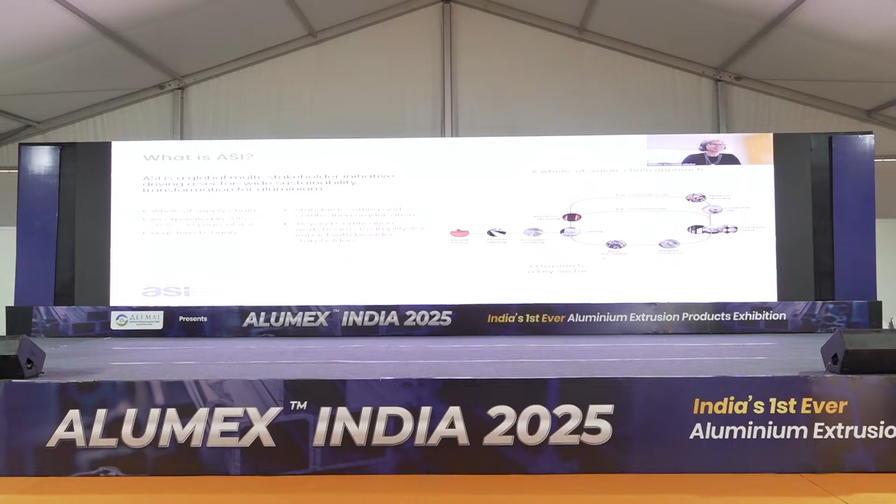We're 10 years old this year, in 2025. We were incorporated back in 2015, and we are a registered charity. Our prime focus is on standard setting and certification, but we also work beyond certification, as we call it, to try and amplify our impact with broader stakeholders such as communities and Indigenous peoples.

Our membership has been growing very steadily over the last 10 years, and we are getting closer to 400 members. Through our certification program, we have more than 500 certified facilities across 63 countries. In India, we have a range of members that are headquartered here, as you can see on the left, and on the right, a selection of some of our extrusion members globally.

What we do is work to promote measurable and continual improvements in the key environmental, social and governance, or ESG, impacts of aluminium, and that underpins the decisions that we make as companies. We have a standard setting and certification focus, but beyond that, we are also working to train and build capacity for members, auditors, and other stakeholders to implement these better practices.

We collaborate through partnerships and with other organisations, including through cross recognition, to try and make sure that we can leverage what we're building in ASI and connect it with the huge amount of work happening in this space. We also carry out data and research to measure and evaluate the sector and the value chain more broadly.

The traditional one can be applied in a layout of, for example, a horizontal or a spray vertical line. You start with an alkaline cleaning, rinses, the deoxidation of the surface, and then it's ready for conversion coating and rinse. It is true that this rinse before the conversion needs to be of the best quality possible. So if it's possible, DI water, much better, or if not, maximum 100 microsiemens. So this is a Henkel solution, an example of a line for an alkaline degreasing.

We have different products, or by acid, as Bonderite CAK 2105 or the 24600 that I will talk about later. Acid etching, and of course this conversion coating, our Bonderite 483031 or our Bonderite 400. Both products are approved by Qualicoat and also by GSB. It works at really low temperature and low concentration compared with chrome 6, which works at a high concentration. The layer of this product is milligrams per square meter, so it's really a low conversion coating, and it can also be applied by APNR, and I will explain later what the APNR system is.

So in that case, I would like to introduce this new product, a new launch from last year, which is the Bonderite CAK 24600. It's a traditional alkaline degreaser, an alkaline etching degreaser.

In the traditional step, this kind of product is a mixture of soda, potassium, and other additives. With this new product, we are able to etch the material at the same time, as you can see, 2 minutes, keeping the same rates, but we are able to decrease the temperature.

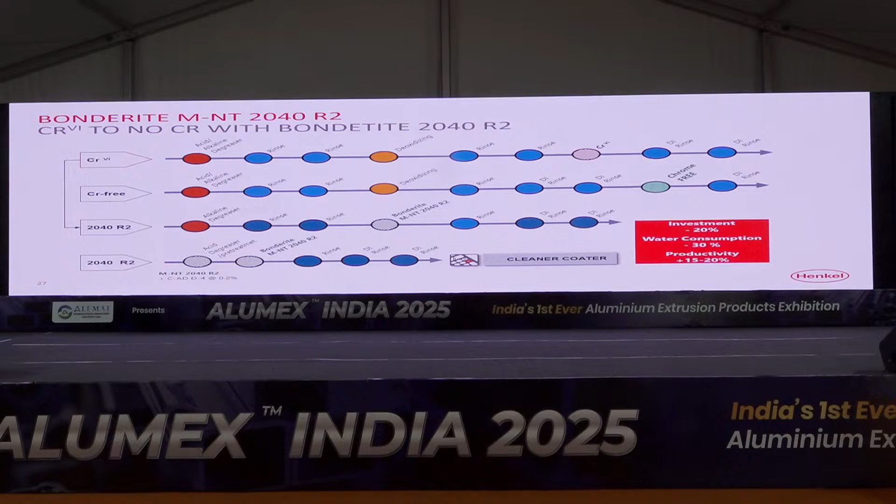And last but not least, this is our APNR system. What is an APNR system? It's an adhesion promoter, no rinse. It's equipment that can be easily installed at an existing customer. At the end of the line, it's spraying a mist. You are mixing the product at the same time, so it's free of pollutants, and you can ensure that your material will be free of pollutants. It's always fresh. It goes directly to the material, and it's only a dust.

It's a mist. So for the wastewater treatment, it's not a quantity of water, so you can save a lot of water. This is really useful, for example, for customers that are working with Chrome 6 and want to change to a non-Chrome 6 system. Why is it important? Because if you've been working with Chrome 6 for so many years, in these Chrome-free products, 1 ppm of Chrome is a pollutant. So you can damage the non-chromium product, the process itself.

So if you install this APNR at the end of the system, you create the non-chromium without any problem and without any fear that the material will be contaminated by the Chrome 6. We have more than 100 units installed and working perfectly. And as I told you, it can be an option for all the customers that want to switch from a Chrome 6 technology to a non-Chrome 6 technology with a minimum investment, because it's really easy to install and no modification in the line is required, because it goes directly at the end of the line.

Designed with sustainability in mind, Bonderite APNR significantly reduces chemicals, water, and waste, enabling safer handling of your product. Enjoy consistent, high-quality results without the need for constant supervision. Bonderite APNR keeps your line running smoothly with our own fresh chemistry. Are you ready to revolutionize your metal pre-treatment process? Discover the power of Bonderite APNR, where innovation meets simplicity.

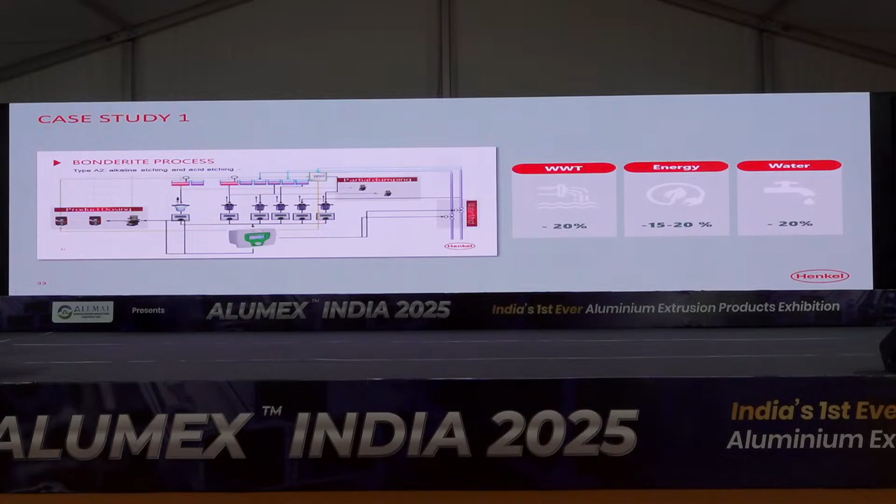Okay, so here is an example of a real existing customer who installed the APNR and all the pumps and all the equipment to control everything in alkaline etching and acid etching, and that was after some months of treatment. That was the results directly from the customer, that he was able to save 20% in wastewater treatment. They reduced the energy between 15 and 20% with the previous process, and they reduced also the water consumption of the total plant.

And the last topic, let's talk about anodizing and sustainability, our most innovative product for the anodizing. Our challenge in anodizing, and not only in anodizing, in most of our products, is to try to get the same quality, but with more sustainable products in terms of reducing time or reducing temperature during the pre-treatment, and if it's possible to give our customers energy savings or less water consumption. So this is the aim. So we will be focused on etching, anodizing, and sealing.

For the etching, I would like to introduce the Bonderite CAK 62350. This is a product aimed to get the E6 finishing to the material. And the benefit of this product compared with the traditional ones in the market is that it's really easy to rinse off. Remember that it's a really high alkaline bath, so it's really sticky. So with this new improvement of the product, it's really easy to clean it. You avoid over-etching, and as you clean it easily, you avoid also the carryover.

Now let's move to the anodizing additive. Everybody knows that anodizing, if you want a good quality of anodizing, you must keep the temperature between 18 or 20 degrees. In theory, it's not possible to create a good quality of pores, not able to anodize over these 20 degrees. With this additive, this Bonderite MAD 2008, we achieve 24 degrees.

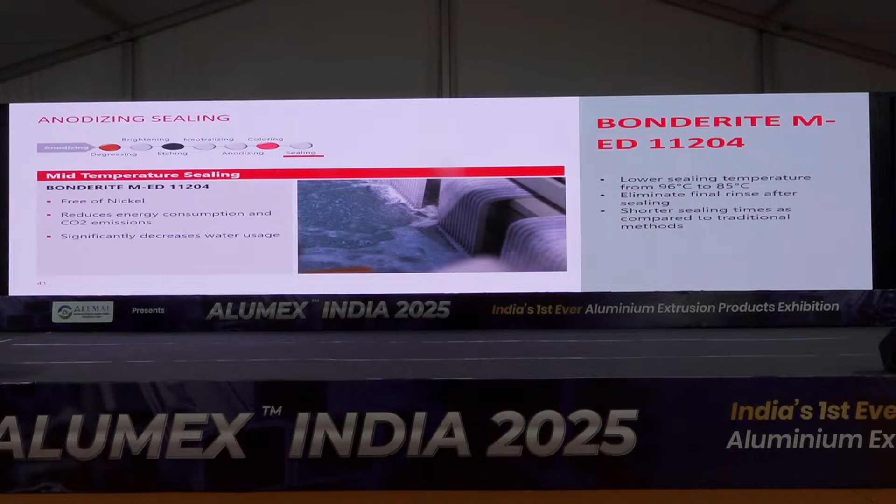As soon as the material is sealed, you can discharge it and sell it as soon as possible. And it even has shorter sealing times compared with the traditional medium temperature sealing. So it means that you reduce the energy consumption, the CO2 emissions, and of course the water usage.

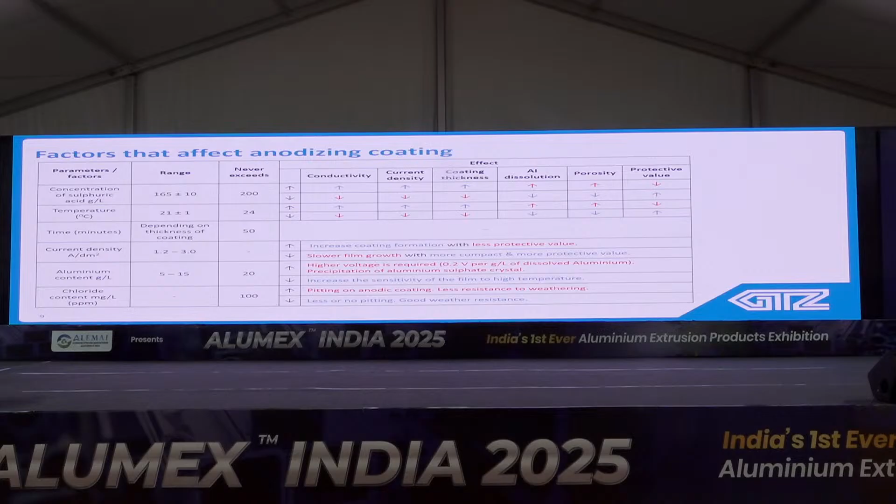Aluminum content in the electrolyte is also important. If aluminum content is more than the maximum range, then higher voltage will be required. It is not desirable. Heat generation will be more, and the coating aesthetic look will be less. Then chloride. Chloride is detrimental for any corrosion resistance coating. The same logic is applicable to anodizing coating also. The maximum tolerance is 100 ppm. So for anodizing, DM water, chloride-free water, is desirable.

Now I will be discussing types of anodizing. There are three types: type 1, type 2, type 3. The major variation is the coating thickness in microns. Type 1 is the least, and type 3 is the highest coating. Another is the variation in the electrolyte. In type 1, chromic acid electrolyte is used, and type 2 is sulfuric acid. Type 3 is also sulfuric acid with lower temperature and higher voltage. So the application is different. The major application is type 2 for general decorative and functional architectural purposes. Now the classification is two types: one is natural non-dye type, and another is dye type.

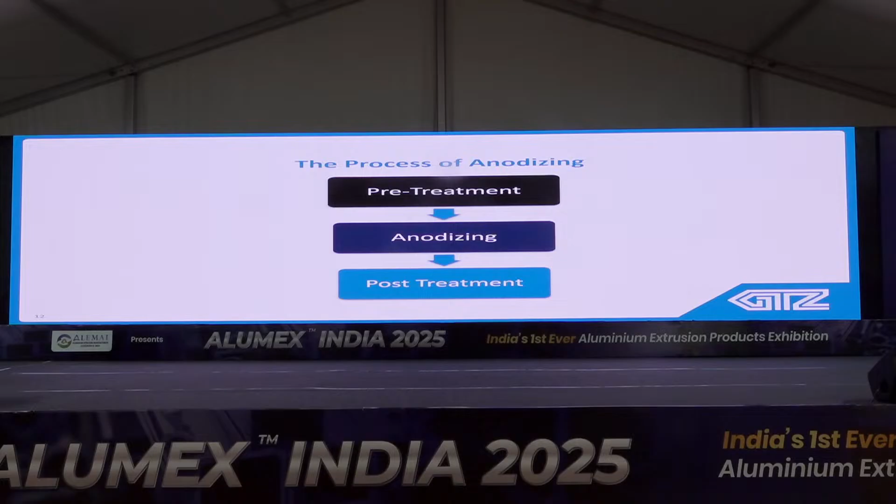The total anodizing process is pre-treatment, then main anodizing. After that, post-treatment includes coloring, electrocoloring, and sealing. So this is the pre-treatment synopsis for natural anodizing: acid degreasing, caustic degreasing, desmutting, and then sealing as post-treatment. For satin finish anodizing, one extra process is there for satin finish after desmutting, then another desmutting. So before anodizing, the pre-treatment always ends with desmutting. Similarly, bright anodizing: non-etch type alkaline cleaner, followed by chemical brightening, then desmutting, then anodizing.

For color anodizing, electrocoloring, possibly dyeing, and immersion chemical dyeing. But after anodizing and coloring, sealing is a must, and in every variety there is sealing. That is the last and final treatment of anodic coating.

Suitability of aluminum and its alloys. There are different types of alloys that can be anodized, but the most popular are the 6000 series and 7000 series. 6063 is versatile and mainly used for anodizing purposes. It is an alloy with silicon and magnesium.

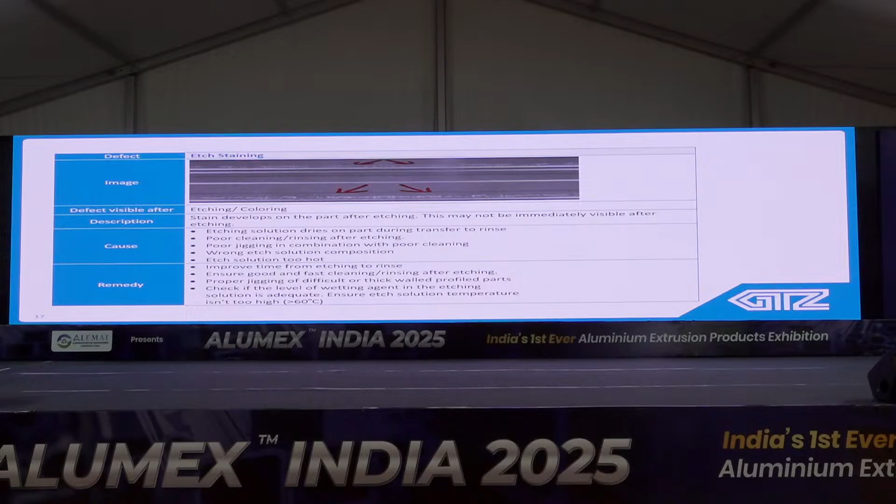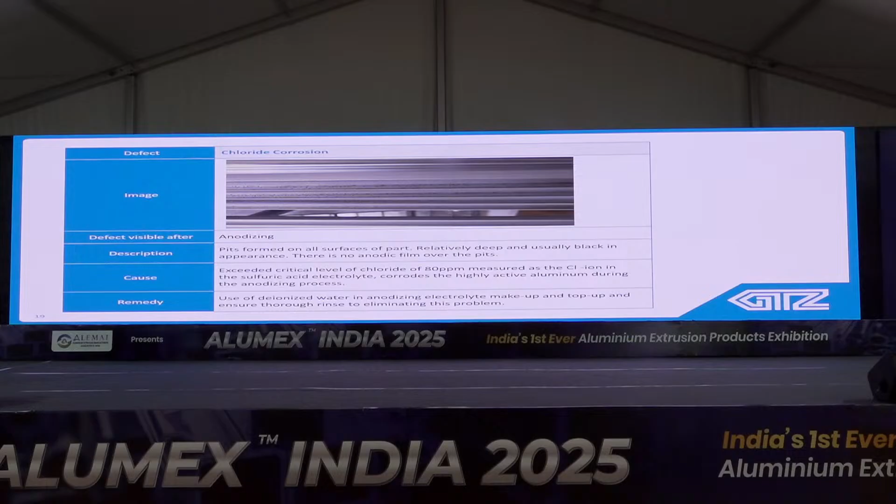Chloride corrosion can be visible after anodizing. Pits are formed on the surface. So how is it remedied? Use a chloride-free bath, chloride-free water in the anodizing bath, and take care to avoid any drag-in in the anodizing bath from the earlier stage.

White spots are visible after electrolytic coloring, dyeing and sealing. There are varieties of white spots with many reasons, depending on the shape and location of the white spot. Main causes are poor rinsing, poor desmutting, and mold formation in both the rinsing bath and dyeing bath.

So how to improve it? Rinsing can be improved by excess flowing of water and increased time. For fungi growth, the rinsing tank water should be changed, or fungicide or algaecide can be added.

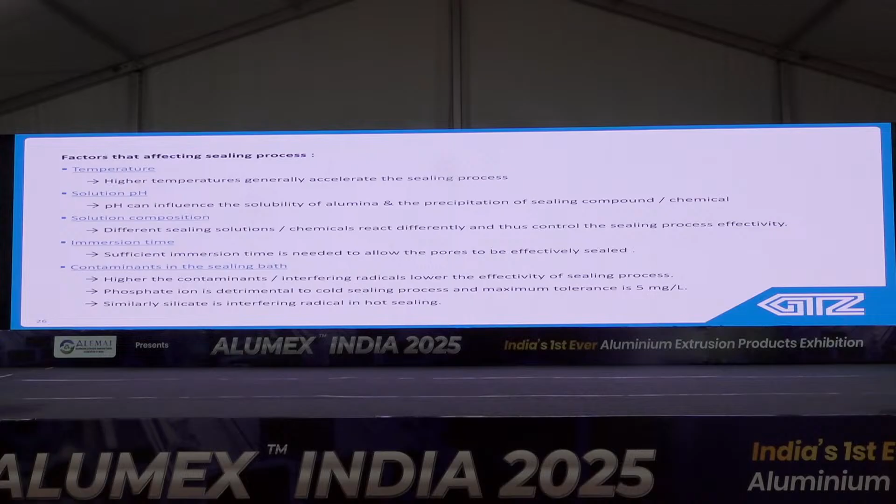Now, type of sealing depends on the temperature of application. There are three types: cold or room temperature sealing, mid temperature sealing, and hot sealing. Cold sealing is mainly divided into three parts based on composition. First is nickel fluoride base, second is nickel acetate base, and third is the newly developed nickel-free chemical.

Initially it was based on lithium, but due to the introduction of lithium batteries, lithium is becoming costlier, so magnesium has been attempted, because magnesium is in the periodic table diagonally opposite to lithium. So most properties of both lithium and magnesium will be similar. That's why magnesium-based nickel-free sealing, both for cold and mid temperature, is gradually becoming popular.

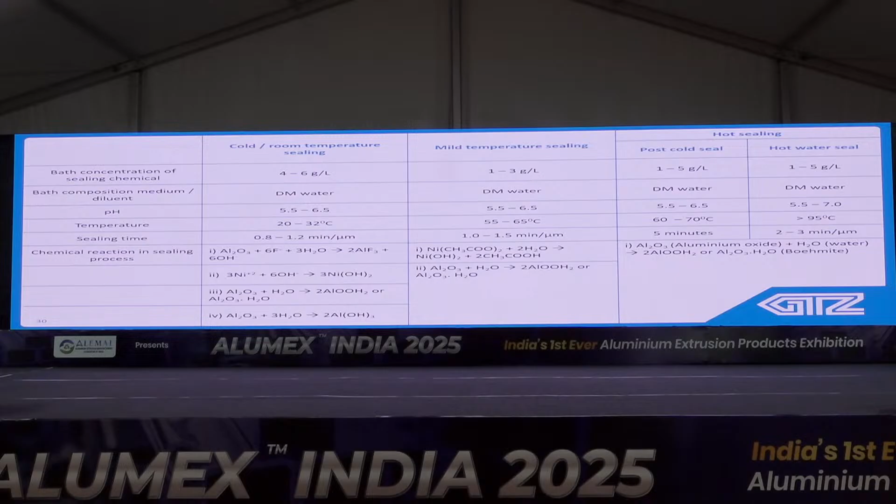Another hot sealing is also done after cold sealing. Here time is not so important; only 5 minutes is required for this post cold sealing treatment.

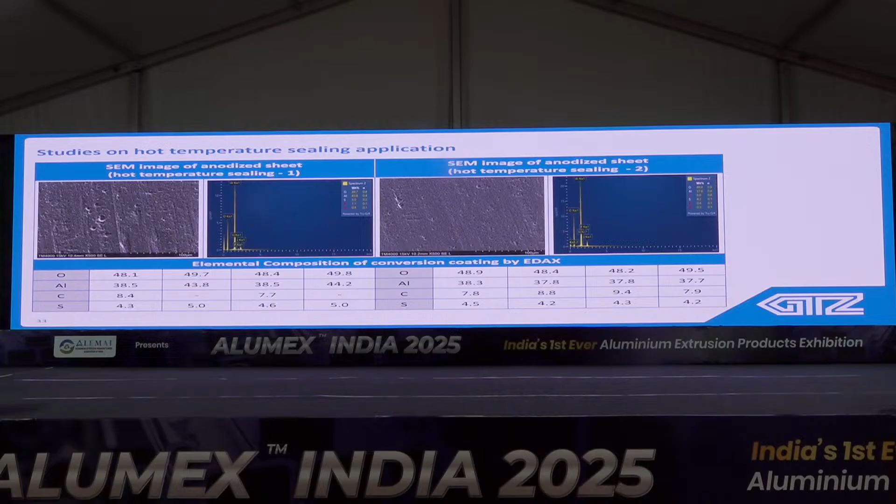Now the hot sealing, similar in picture type to mid temperature. The first picture of the same is the half sealing stage, and the second is the full sealing stage. Here there is no metal, so you can see from the carbon, which represents organic content, that in half sealing, carbon is not uniform and the average is still less. For full sealing, carbon is everywhere and the content is higher than in half sealing.

Testing of sealing quality involves mainly four tests. One is the dye spot test as per ISO 2143, mass loss test using formic acid and phosphoric acid as per ISO 3210, then admittance test—since aluminum oxide is inert and not conducting, aluminum conductivity will be less, so admittance is measured, which should be less than 20 microsiemens, and one is a visual test.

So I have completed the polynote system, more or less all parameters and details. Now I will move to the polycoat system, which is the pre-treatment or conversion coating on aluminum prior to powder coating.

This is the process flow diagram. Initially pre-treatment surface preparation: degreasing, etching, desmutting, or a 3-in-1 system. Then pre-treatment, which is conversion coating, is of three types. One is hexavalent chromium based, and depending on color it is further three types. Green, which is less commonly used and mainly for military precision, has the highest coating thickness or weight.

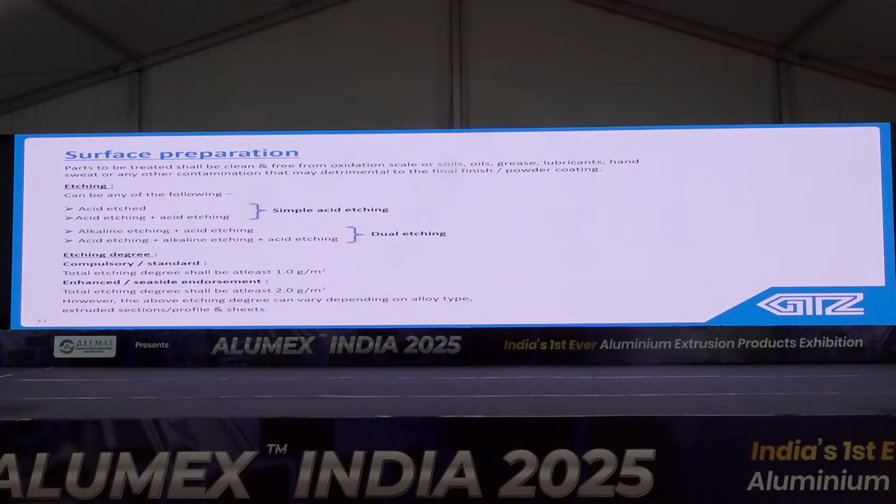Now I will discuss chrome 6 conversion coating, that is yellow. This chemical is mainly of two types depending on the component of the system: single component and double component, A and B. One is for initial bath preparation, and the second, B component, is for bath maintenance.

The special parameters: pH is similar, 1.8 to 2.2. Application temperature is room temperature. Curing time may be natural curing or at some 60 degree temperature. PMT can be applied for quick drying. Dipping time is 2 to 6 minutes for single component, and for double it is 3 to 9 minutes.

We have tested different coating weights at different dipping times. For single component, dipping time 2 to 6 minutes, and coating weight matches our normal specification of 600 to 1200. Similarly for double component, dipping time is 3 to 9 minutes, and as time increases, coating weight also increases, but remains within specification range.

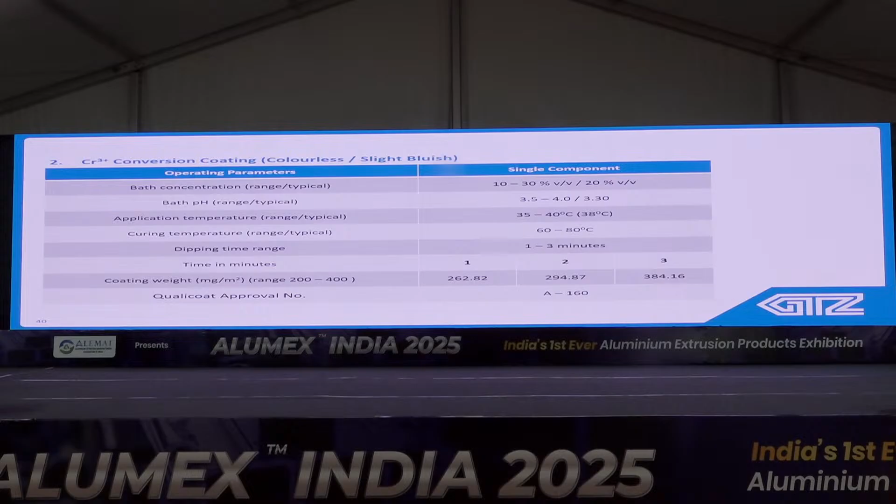For chrome free, the colorless version has a little lower consumption than the yellow color. Yellow color is just double the colorless coating, because thickness of this coating is also higher. pH is similar, application temperature is room temperature, curing temperature is around 60 to 80 degrees. Dipping time varies: for colorless, as coating weight is less, it's 2 to 4 minutes, and for yellow it is 4 to 8 minutes. The coating range for colorless is 75 to 150 mg per meter square, and for yellow it is a little higher, 300 to 700.

It is also Qualicoat approved. The approval number is A159, so it also passes all the Qualicoat parameters after powder coating.

Now, what is the advantage of chrome free? It is environment friendly, and RoHS, ELV, WEEE, REACH, and OSHA compliant, with satisfactory corrosion resistance similar to chrome containing product, compatible with paint, powder coat, easy wash treatment, and higher heat resistance.

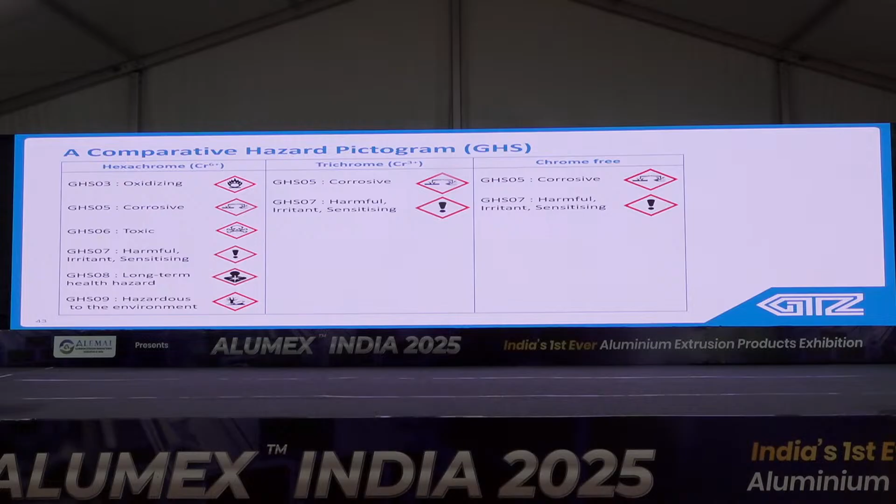So this is the hazard pictogram. If you consider hexavalent, all types of hazard are there, and it is also carcinogenic. In trivalent chromium, only corrosive and harmful, and chrome-free is also similar, but trichrome is the intermediate, as there are some papers which indicate that trichrome on prolonged exposure to UV light can be converted to hexavalent. That's why trivalent is the intermediate step and chrome-free is the final step to get RoHS compliant coating.

This is the same EDAX study of chrome-free clear. On the left side is the same picture of the coating before SST, salt spray hours. And this is the EDAX spectrum for elemental composition. We have selected 3 areas and the composition is given there. So before salt spray, just check the titanium content. It is average 7.7%, and after SST, when 5% white rust appeared, it became average 4. So titanium is washing out after salt spray, and titanium is the major contributor to the salt spray hours.

The first slide is the same picture and EDAX spectrum of chrome-free yellow before SST, and the right one is the same picture and EDAX spectrum of chrome-free yellow after salt spray, that is 5% white rust. Here also the main components of chrome-free yellow are organic and titanium. Before salt spray, you can find a higher content of carbon as well as titanium. After salt spray, both carbon, which is the representative of the organic chemical, is getting reduced, and titanium is also reduced.

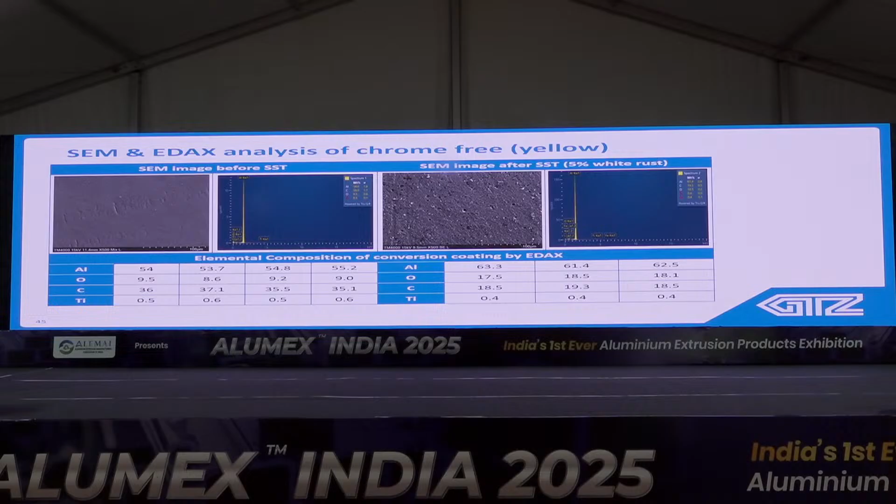Chrome-free conversion coating is very suitable and can replace both hexavalent chromium and trivalent. Different options have been attempted for chrome-free formulation, but titanium, zirconium or a mixture of both are found suitable, and it can replace both hexavalent and trichrome passivation.

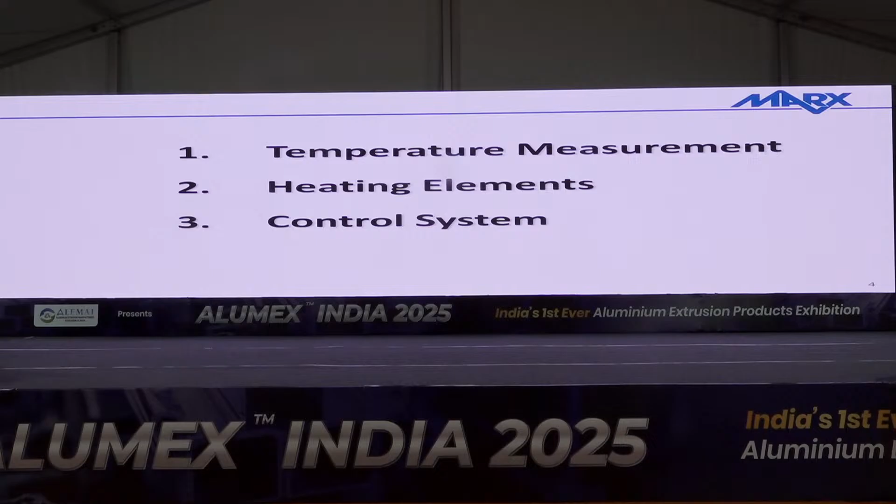I'll present now some key elements of smart temperature control in a container. The first is the temperature measurement, two, the heating elements, and three, the control system. First of all, the temperature measurement. You can see here a drawing of a container, and you see here many zones: zone 1, zone 2, zone 3, and zone 4. This is a heating system with four zones. And you can see in each zone there's an insert for thermocouples with two measuring points. You see here zone number 1. There's measuring point number 1, measuring point number 2, and the same for the other zones.

In the middle, we have a thermocouple. With this thermocouple, we can ensure that the temperature in the mantle doesn't get too high. So temperature recording in the container is very important, for the health of the container and also for the good quality of the end product.

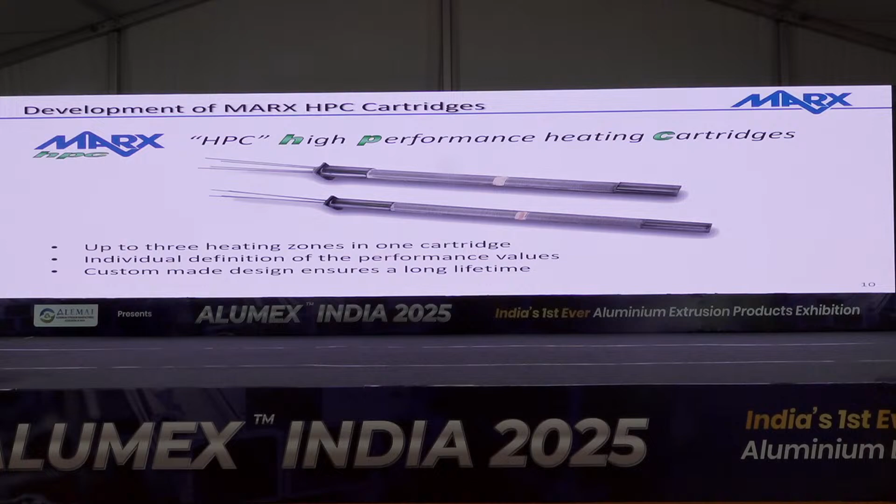The second key element are the heating elements. So I'm presenting now the Marx HPC cartridges. These are the high-performance heating cartridges. We can achieve with these heating cartridges up to 3 zones per cartridge. With this kind of cartridge, you have an individual definition of the values in each zone. And it's also possible with this cartridge to have a custom-made solution for every heating system and for every requirement of the customer.

These are some possible heating zones that can be reached with our heating cartridges. You have here one zone heating, you can get also 2-zone heating, one ring at the die side and one ring on the stem side. You can have also upper and lower shell, and also 6 zones here with rings and upper and lower shells.

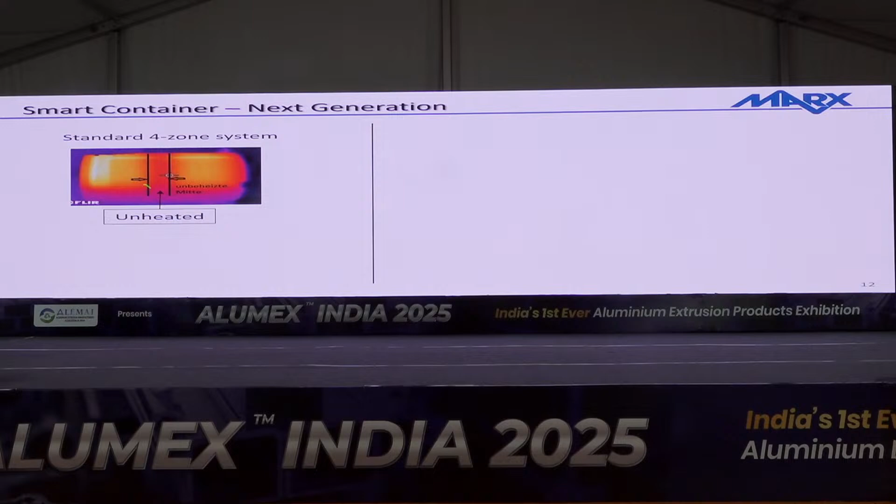Here you can see a standard 4-zone heating system. You have an unheated area in the middle of the container. You have zone 1, 2, 3, and 4. And this is the new heating system which we call next generation. Also here you have a variable heating zone in the middle. So this is really a physical unheated zone in the container.

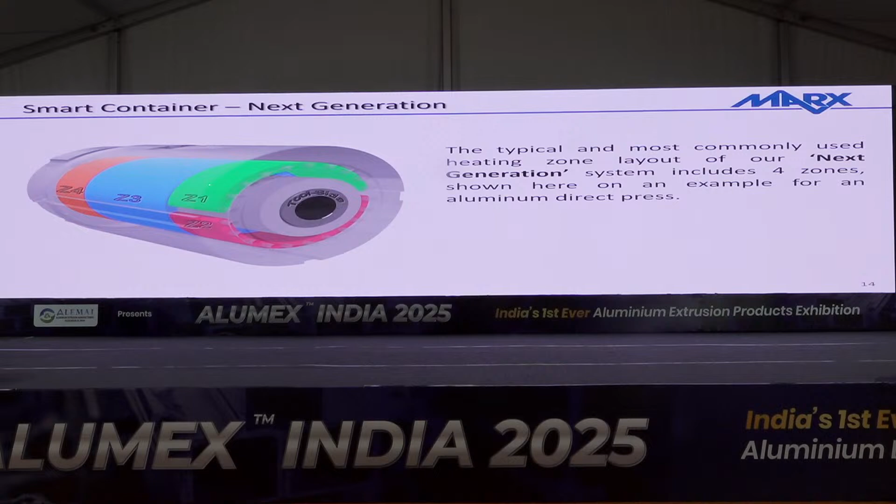And this is the typical and most used heating zone layout of the next generation system, including 4 zones: zone number 1, 2, 3, and 4. Zones number 1 and 2 are on the die side, zone 1 representing the upper shell, and zone 2 representing the lower shell. And we know that the temperature in this area of the tool side is high during the process. And the temperature always goes from bottom to top.

So we have to ensure that the temperature here gets lower. So we reduce the power of this zone, or we shut it completely off. It depends on the temperature in the moment of extruding. So we can save a lot of energy by decreasing the power put through the control system.

Zone number 4 prevents the cooling of the front side while producing, because on this side there's no isolation, nothing, just air, and the container loses a lot of temperature on this side. So we need this zone to keep this part of the container also at the set point temperature of the extrusion.

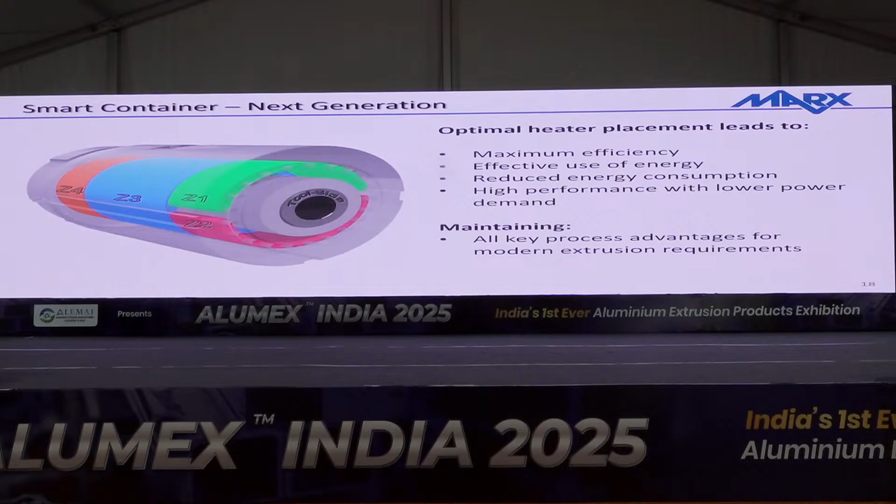Why do we do that? Because the inner liner is the fastest part of the container that reaches the required temperature, because of the process energy introduced and also because of the hot billet that is put inside the container. So arranging the cartridges directly in the inner liner, in this case here, causes the system to switch off immediately, because the thermocouple records in this area that the temperature is high and it has to shut off. So when you shut off here, the mantle will still be cold, and you will have big temperature differences between the inner liner and the mantle, so that you have temperature shocks that could lead to cracks in the container.

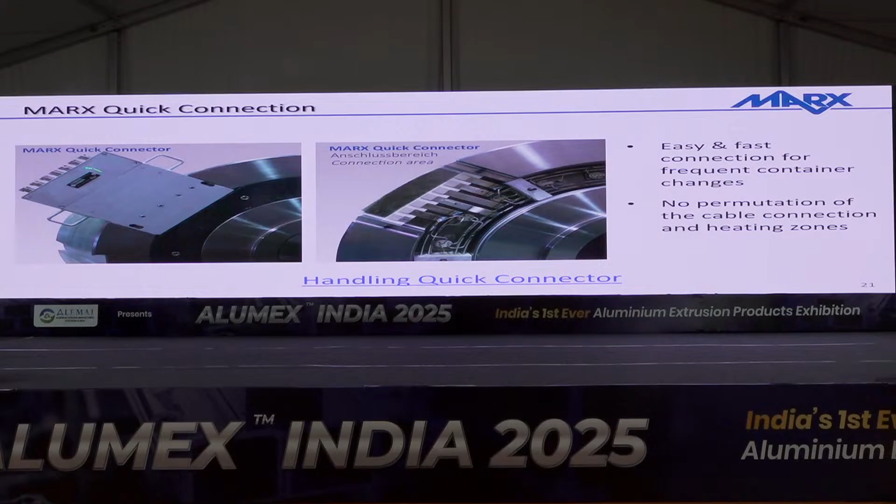What is also very important for a smart heating system is our quick connector. With this connector, it is easy and fast to make a connection from the power cable for power supply to the container for frequent changes, let's say one time in 6 months. And the other advantage of this solution is that you will never be able to switch the cable connection and the heating zones, because everything is arranged here. Here will come the power cables, and they go directly to this connection with silver plates. We have also the compact connection. This is also very easy and reliable, and here we also have an advantage that no permutation can occur while connecting the heating system.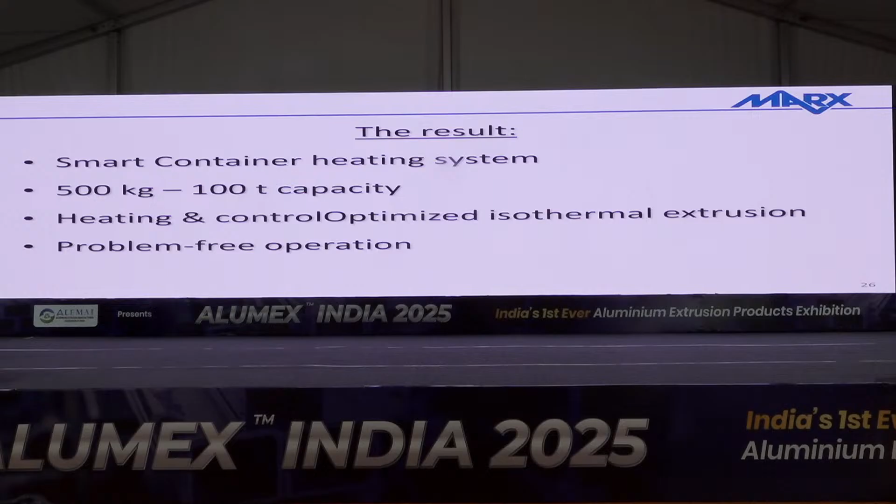So the result of a smart heating system is we can have a smart container, and it is also applicable to every kind of container from 500 kilograms to 100 tons. And you have also a homogeneous temperature curve in the container. And due to all the smart systems we have, like I've shown before, the compact connector, the control system and the quick connector, you have a smart, problem-free solution for the operation in the extrusion industry.

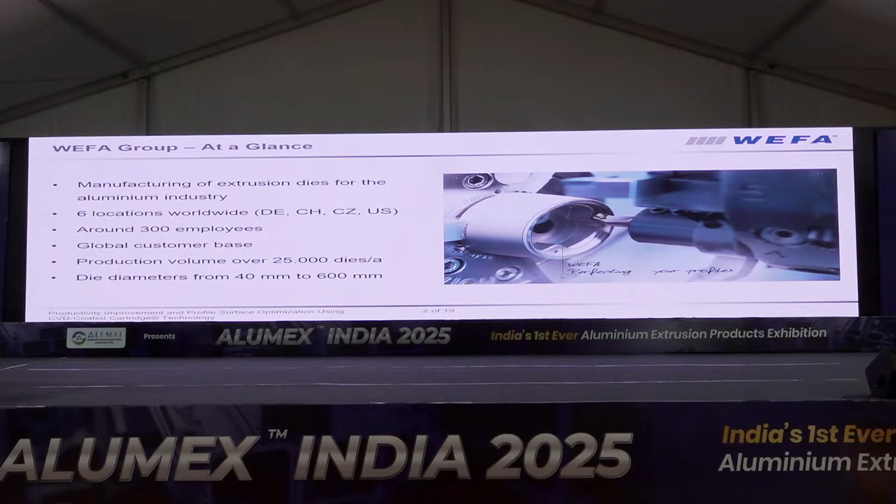So we had an experience from a very old die from 2013. That was only a single cavity die on a 6-inch press, die size 200. In 2019, we tried to increase productivity. So what we did, we increased the number of strands into two cavity, used a slightly bigger die, and then in 2022, we even tried to include a 4-cavity application in a much bigger die on a bigger press.

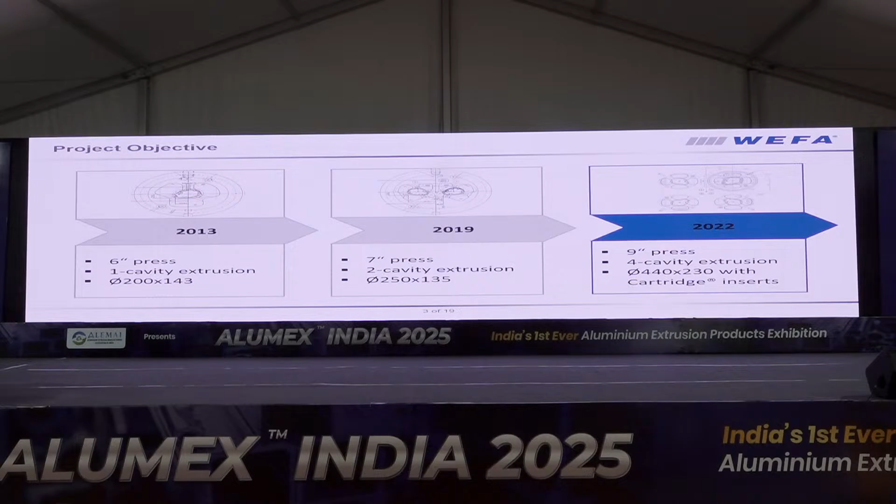It's a 9-inch press. And also here we tried to incorporate 4 little cartridges. So usually you have a big die, and there we try to use individual units, inserts, so-called cartridges. So that was a productivity increase we tried to achieve from 2019 into 22 by doubling the number of strands. And also, that's not the only one. We tried to also use coated cartridge inserts. So these inserts here, which I show you, that's easier. So these inserts are not only cartridges, they are also CVD coated.

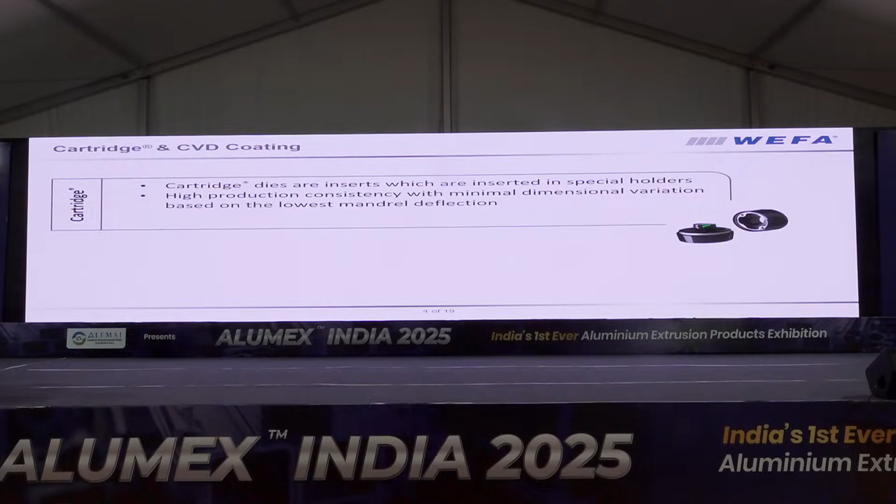So first of all, what is a cartridge? In die making, inserts are very well known, but a cartridge in fact is inserted in an individual special holder. Then high production consistency with minimal dimensional variation is possible, because it is a taper execution, and these tapered cartridges are clamped back to the backer, so it's totally stable inside the holder. So therefore, if this is the mandrel, there is only a minimum deflection, so you can run very precise profiles. Very small tolerances are possible with this type of design. Very small mandrels are also possible.

And then what does the CVD coating do? CVD coating stands for chemical vapor deposition. It's a special treatment of the die after the production. So instead of nitriding, which would be 5, 6, 7 times renitriding, we would just do one single CVD coating. So all the materials of the coating are evaporated, and on the hot tool surface they build up layer by layer into a very hard, almost 2,000 or 3,000 Vickers hard coating.

Of course, longer service life is one of the aims with the coating, but also with the design of the bearing we can optimize a better surface finish. So not only the coating, but in combination with the bearing design, we are able to get a better profile surface. Higher extrusion speeds are achievable due to the reduced friction of the coating. Exit temperatures usually can be reduced by minus 10 degrees C. This can either go into higher speed or even better surface finish. Both can be used.

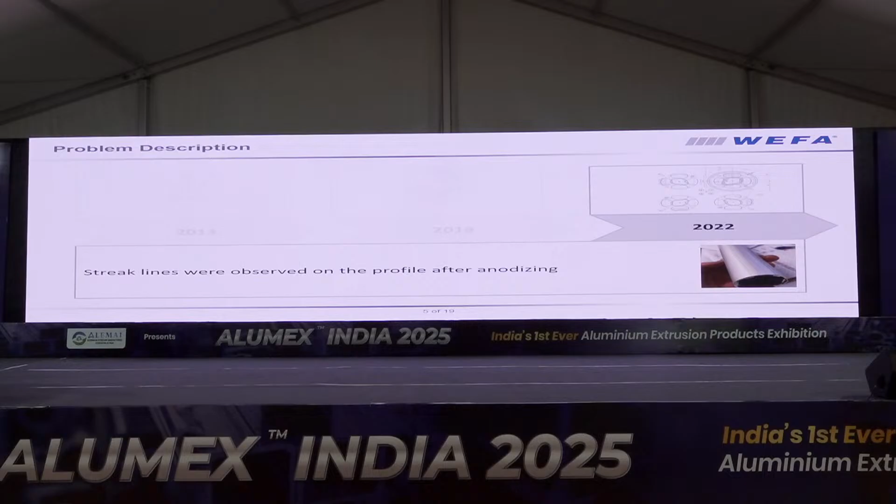So what happened after we included these cartridges in 2022? Of course, everything was perfect. Only we had so-called streak lines. They were observed after anodizing. This was not seen before, and also created a problem for the customer. Here you can see it a little bit more in detail. That is something which was not acceptable after anodizing.

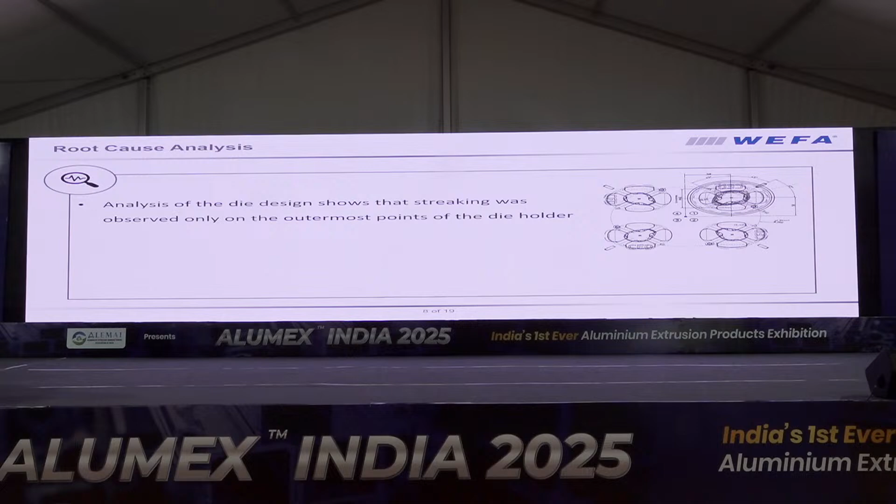So here again, that was the streaks. And for stability reasons, the profile positioning in the die holder is more on the outside of the billet. You can imagine these cartridges need a little bit more space outside, so it's not an optimum anymore. So you need to get cartridges a little bit wider and outside of the holder.

So our observation was that the billet skin could have had a grain structure that could have been coarse, and so-called dirt and oxides could move into the profile sections and lead to an uneven grain formation, which then created these streaks we've seen.

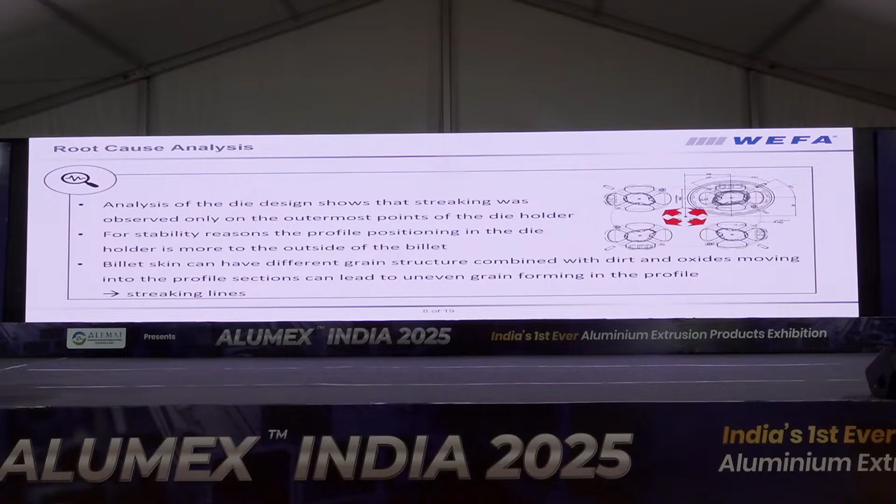So we also tried to simulate the results afterwards. This was done by QForm software. So we have QForm also here in the show. Welcome.

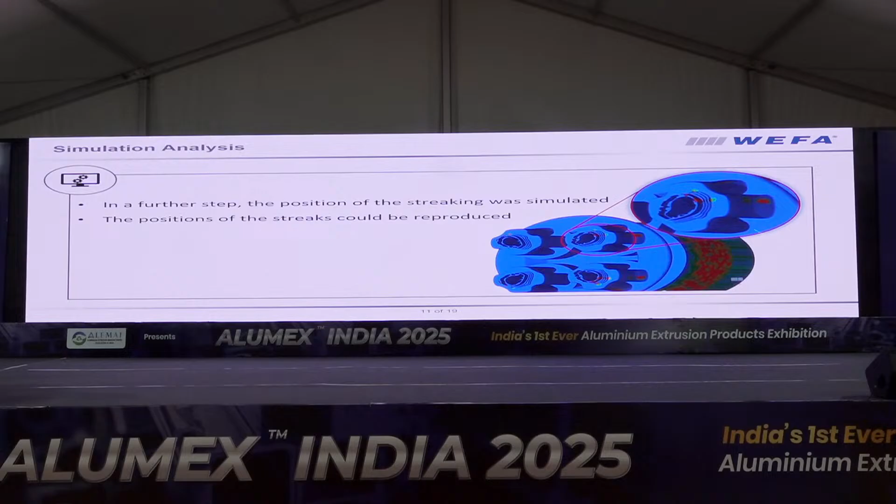Also again here, a little bit closer, it could be reproduced. The simulation highlighted the exact same location which we had seen during extrusion. So, of course, we tried to optimize the design, and we had a couple of ideas. Also, we used software simulation to see what we had done from an engineering standpoint.

The die and the holder were adjusted, so in the first step, we tried to reduce the maximum material inlet, and then in a second step, we even separated the inlet. So instead of one big feeder, we created small feeders, and that helped tremendously for optimizing the design and avoiding these streaks. Based on these results, with the separation here, we could see this also.

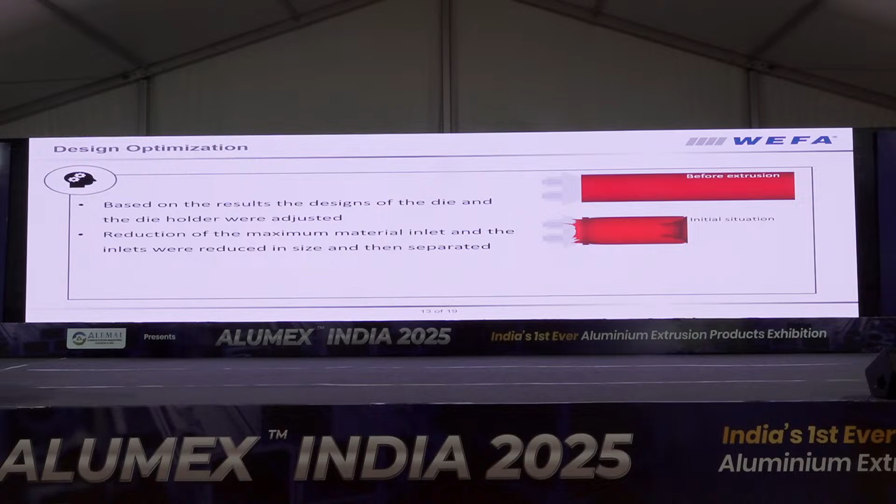That only after 350 millimeters the remaining billet skin entered, so we could reduce the effect by that. But with 350 millimeters the butt length was still too long. So we were also forced to do something during extrusion, to work with the extruder. So what did we do?

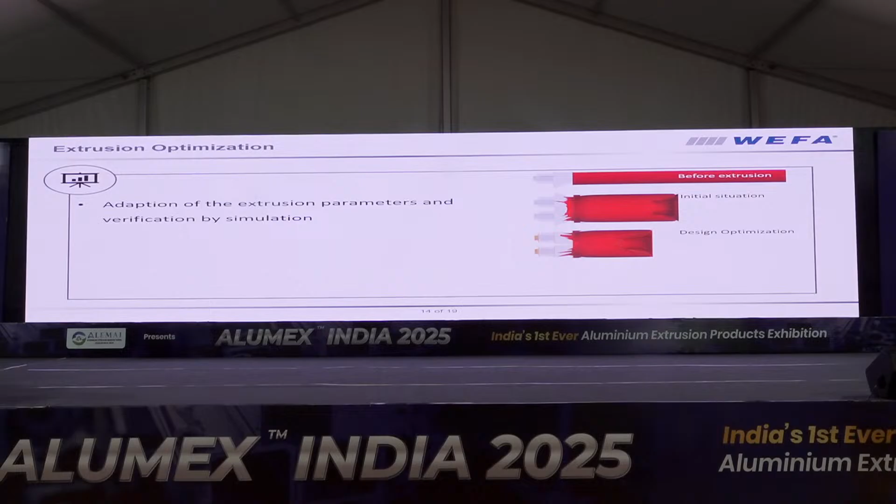We adapted the extrusion parameters. What helped is that we decreased the container temperature, the overall container, not only part of it, the entire container temperature, reduced by 30 kelvin, and we also reduced the billet length by 200 millimeters. So we saw that only 120 millimeters were left for the skin entering into the die stack. So tremendous success, also working together with extruders.

Practical application, of course: we discussed in a partnership with the extrusion people, the die team there, and of course the simulation results were verified. So you see here there were no streaks anymore, so that helped. And the design adjustment was implemented into the new die holder, of course.

And we also examined the butt. So we did some cross-section analysis, and we could find that there were no residues anymore. So in the end, we recommended the extruder increase their butt length a little bit, by only 5 millimeters. You see, 5 millimeters is not much, but it helps tremendously to reduce the billet skin inlet.

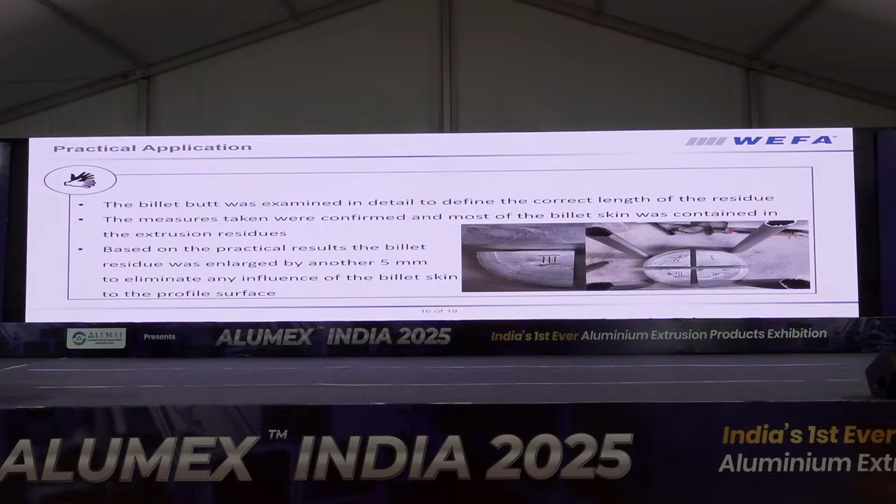That's always something we recommend: not to save on extrusion, and better have a longer billet butt in the end to create a better surface quality in the profile. Yeah, so you see, that was the overall success story. To conclude, we found the cause of the surface defect and could increase the productivity.

Of course, the project showed the importance of a combination of a suitable die design, verification with simulation, and the optimum setting of the extrusion parameters, always in close collaboration between die maker and the extrusion plant. Last but not least, close collaboration can reduce the number of trials drastically. So my recommendation to the extruders in the audience: please keep the die maker in the loop, and our mutual target is to reduce the number of die trials by close cooperation.

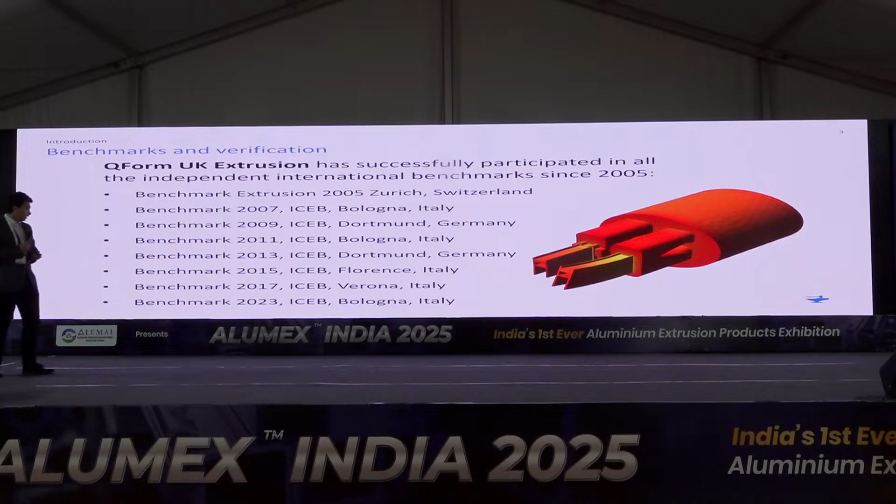For example, considering the welding quality prediction, which was one of the tests provided by the authors of the experiment. So now, let's start from sketch.

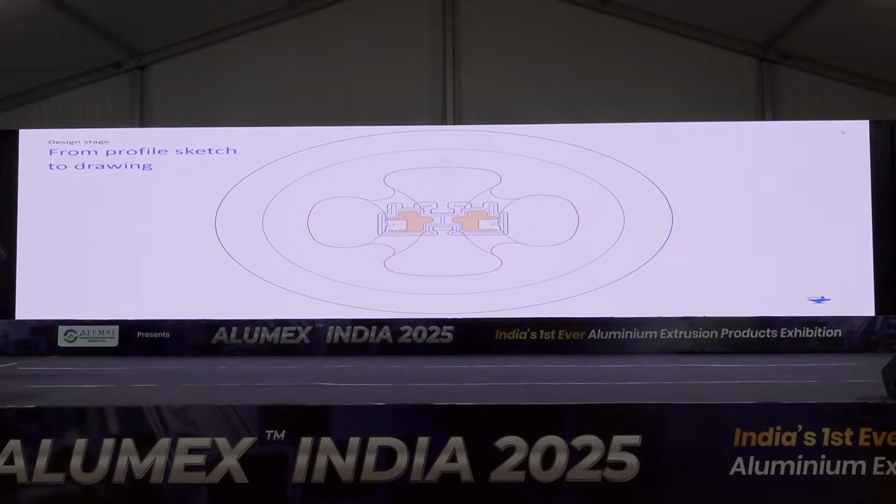Every project of extrusion starts from the profile drawing. Once you start, you need to consider potential thermal shrinkage as well as potential deformation. After that, you look into the container that you have, the press that you have, and then you check what you can do about the ports, and how you will control the flow of your design—using a pre-chamber, using internal features of the design for ports, thinking about cooling areas, some feeding areas that you need to provide for the particular design, and so on.

So the designing stages can be divided into several parts. We start from the 2D contours, then we need to create some parametric model of that tooling set, and finally finish the design and send it to simulation. This is typically how the process of designing a new die looks like when you have simulation software.

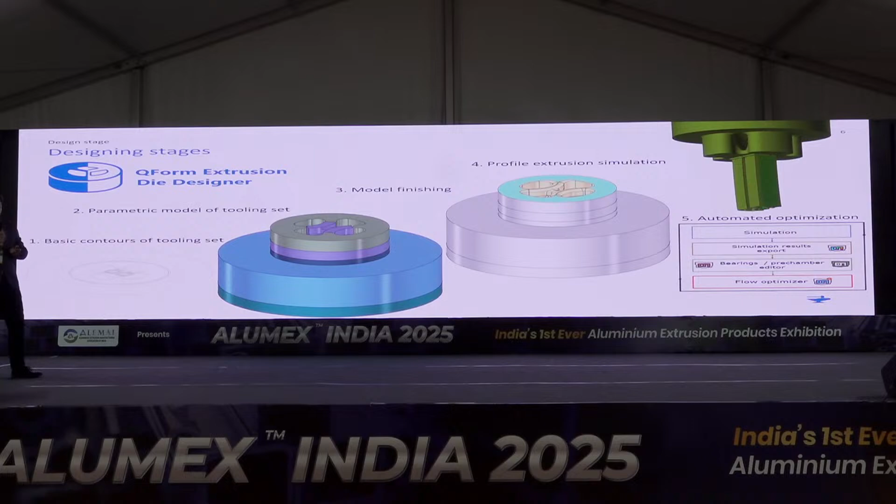With a special solution from QForm called QForm Extrusion Die Designer, it is possible to automatically adjust bearings or the pre-chamber, because we have a direct interface between the two pieces of software—the simulation software itself as well as the CAD that we are developing too.

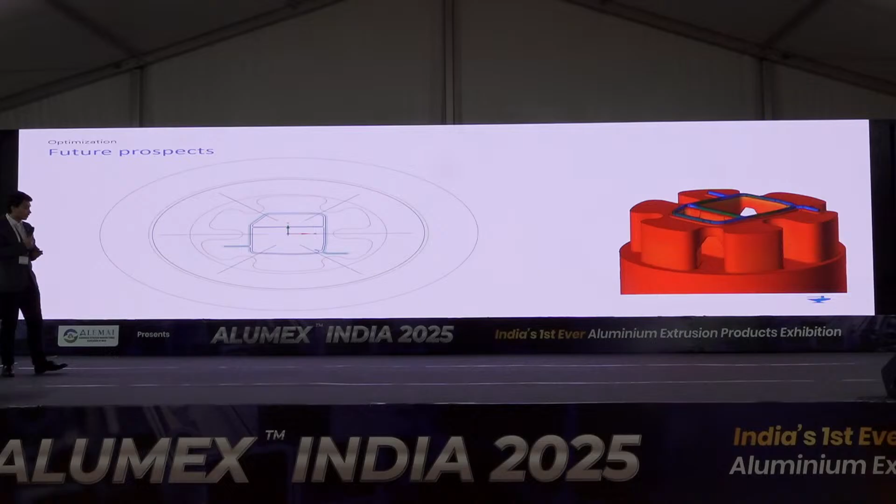Recently, we started to look forward to optimization not only of the pre-chamber and bearings, but also optimization of ports, because simply every port is like a mini container which fills different parts of the profile. So it will obviously be the most influential part.

So what you can see on the screen is the following: there is some contour of the welding chamber that was produced by a real die producer, and the simulation as well as the real results were great. The green contour is now provided by the software, even for the simulation.

So what was done in order to get an almost ideal contour even without simulation? We analyzed around 150 simulations with box-shaped profiles and, using some machine learning procedure, found an equation that makes it possible to predict a coefficient using the offset contour of the profile to produce the welding chamber. This is what you can observe on screen. It's still in the development stage, but we are looking forward to releasing this feature in a new version.

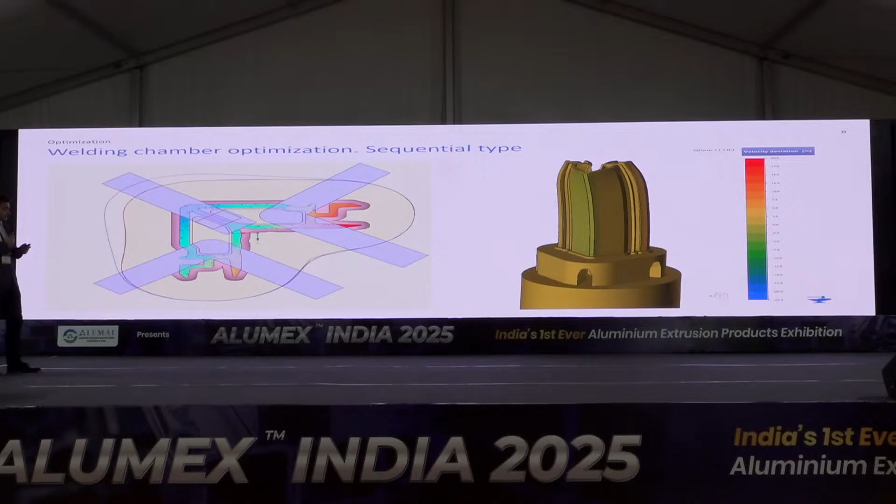Now we will talk about some basics of QForm simulation. There is a very typical approach for metal-forming simulations: typically, a Lagrange model is used, where all nodes are moved along the velocity field distribution. The mesh needs to be remeshed very often, and this process is time-consuming, to say the least, and not very stable. That's why QForm historically used a combined Euler-Lagrange approach, which provides the possibility to simulate the process much faster.

For example, there is a comparison between a standard Lagrange approach and the standard default approach that QForm now uses. If you look, you see that the result is completely the same. That's why we use our current approach, because the simulation time is more than 10 times smaller.

Another thing which is important for simulation accuracy is that we have so-called thermally and mechanically coupled tasks, which provide the possibility to get a very accurate result. So what do I mean?

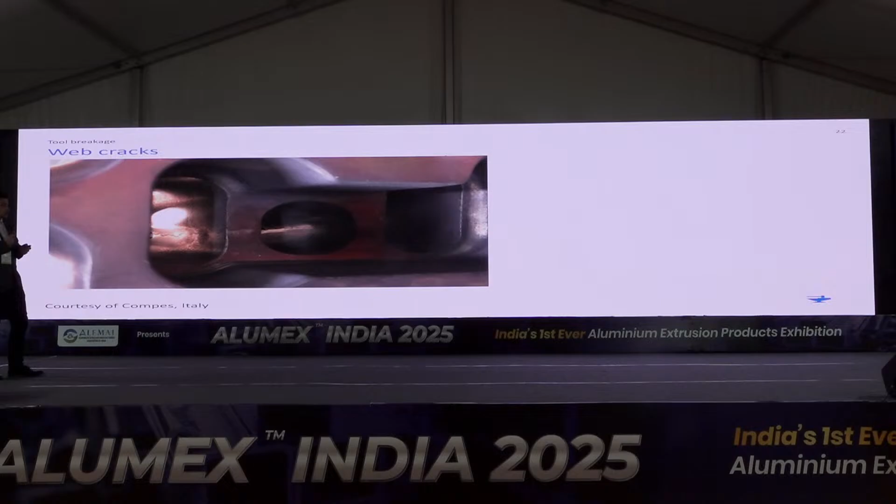There are several approaches to predict this, one of which is checking the plastic zones all around the webs. Once you see it, it's a very direct indicator that something is wrong and you need to redesign the tool. Another example is from an extruder company from Dubai, Gulf Extrusions.

Here we can see a semi-hollow profile. What is happening here? The console parts have a very great area of plastic deformation, as you can see here, and this is the very reason why it breaks.

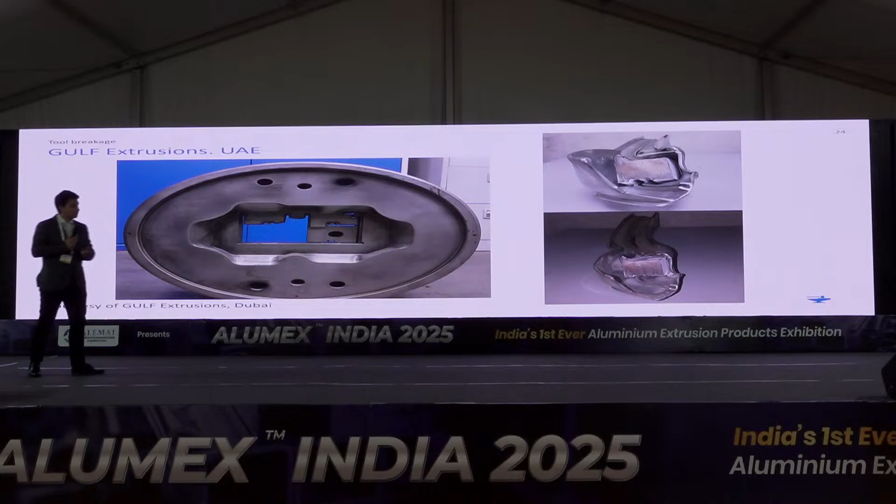And they extruded this core with a profile, which is not a good outcome, to say the least. Another approach is to check the stress state under the webs, because you not only can expect crack appearance on the console parts of tongues because of high tongue ratio, but also under the webs.

Very common, unfortunately - almost every time we can have some plastic deformation under the webs because of very high tensile stresses. We have a special criterion, and once some critical value of the criterion is achieved, using post-processor analysis we can find these areas and say there will be cracks. So there's an exact match of these results, as you can see on this photo.

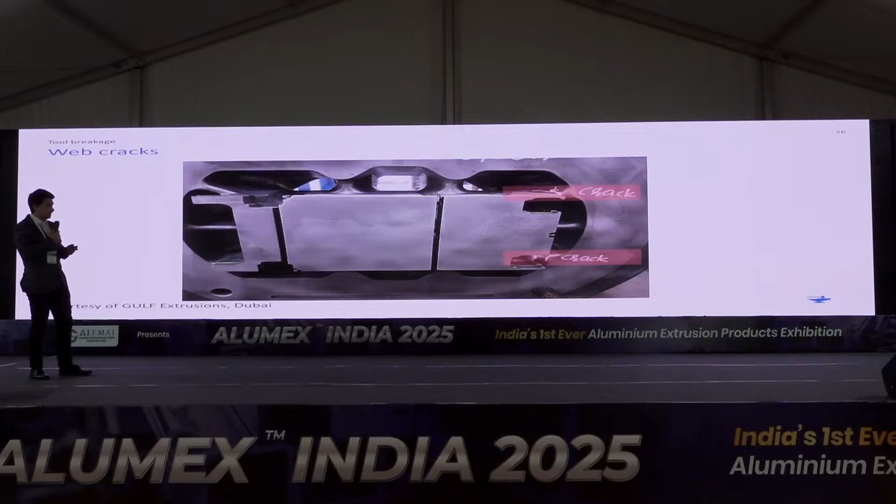Another thing is that after the simulation, once your technology is well done, you can export your profile to a special interface in a new version where you can check the dimensions of the profile. There will be a table where you can see the deviation of the profile according to the drawing and the profiles you can have after the deformation.

So now let's consider several typical extrusion defects that can occur during extrusion. The first one is the so-called underfilling defect. Here you can see the profile with very different thickness in different areas. And here, unexpectedly, they end up with some additional void right in the center of the thick mass of the profile, which is not a good result at all.

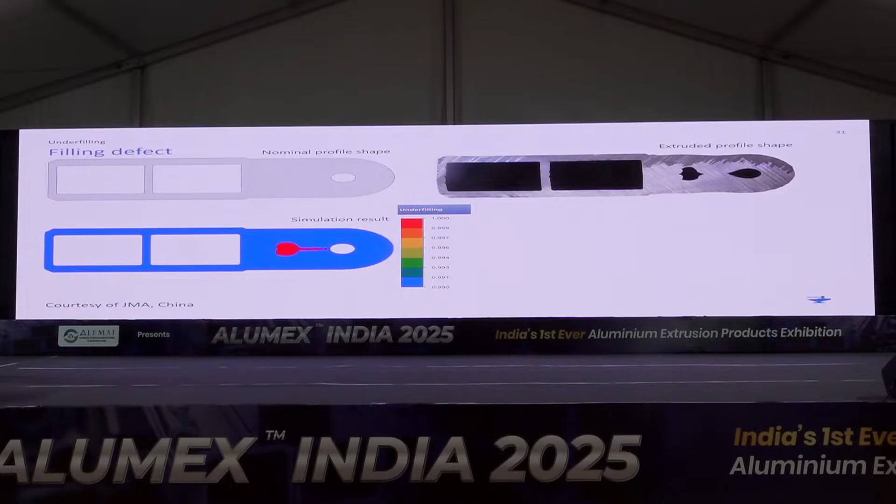If you look deeper, we will find the reason under a particular bridge. So here there are two solutions. You can try to optimize the tool just based on the opinion of the die corrector, but if you do the correction of the bridge in that sense that you make the stability of the core too bad, you can even break the tool. That's why during optimization it's very good to check it beforehand using simulation software before you modify the tool and break it.

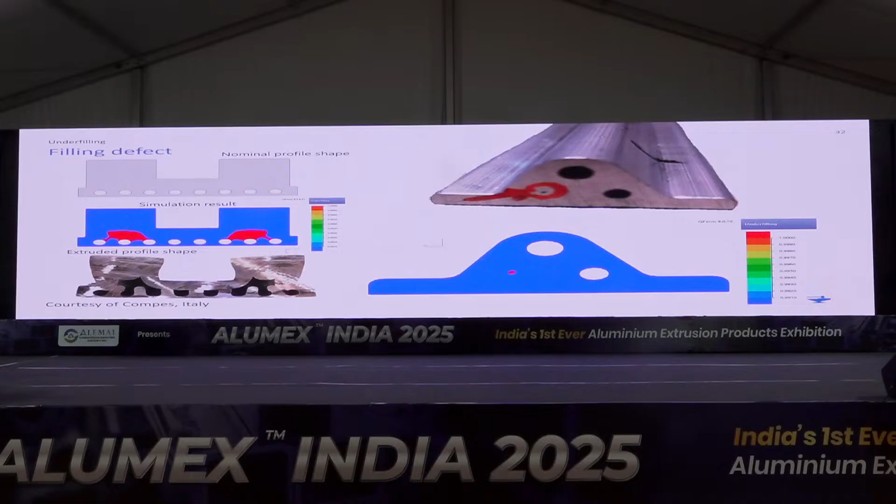There are some additional examples of this defect. The red area shows the underfilling. Streaking lines - we have already discussed this topic today during the WEFA report.

There are typically two main reasons for streaking. Let's consider at least two. The first one is called thermal streaking, or thermal streaks, which appears due to variation of the strain rate and temperature all along particular areas of the profile. Typical areas are T-sections or areas where we have screw bosses, so there is some variation of the section itself. Here you can see, with the different screw bosses and thickness nearby them, a different formation of the streaks - one big and two smaller streaks near the screw bosses.

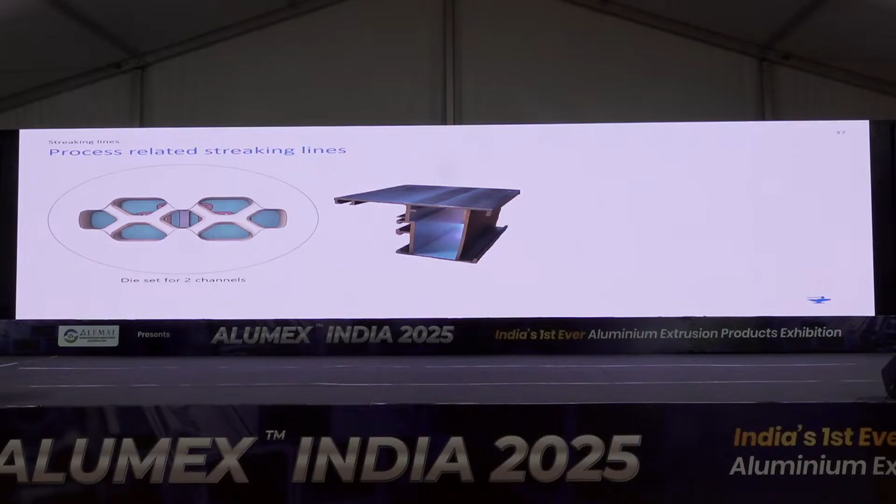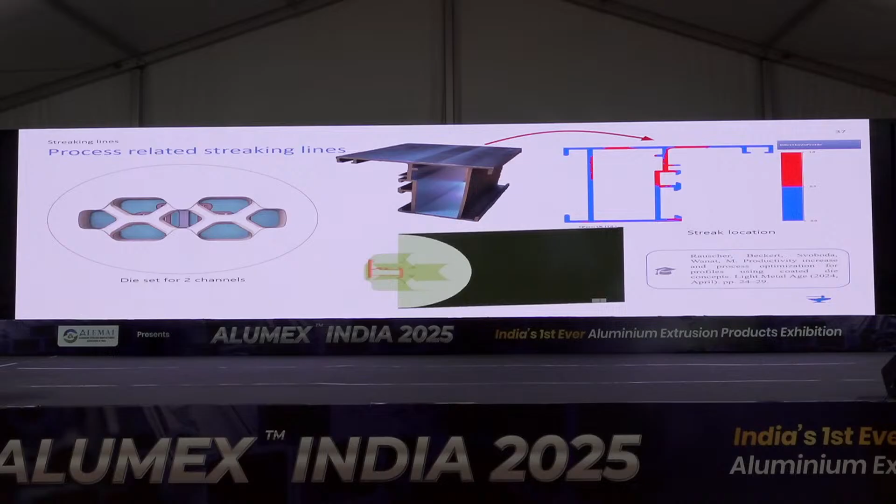Another example, another case - like in the previous case, the reason it looks so is the billet skin. This is a two-cavity design, and here you can see that during extrusion, in the central port, there are a lot of contaminated, oxidized areas of the billet that start to flow, which is the reason, or could be one of the reasons, that led to this defect. So it is possible to analyze your technology from different perspectives.

So we separated it into three categories: structurally welded and mechanically welded. For structural, when we have structural welding quality, it's okay for automotive and for profiles which require very high surface quality. Mechanical welding is okay only in the case when this surface will not be visible to the eye, so it's also okay. Absence of welding is basically a not-welded stage, which is not always easy to achieve, but it happens.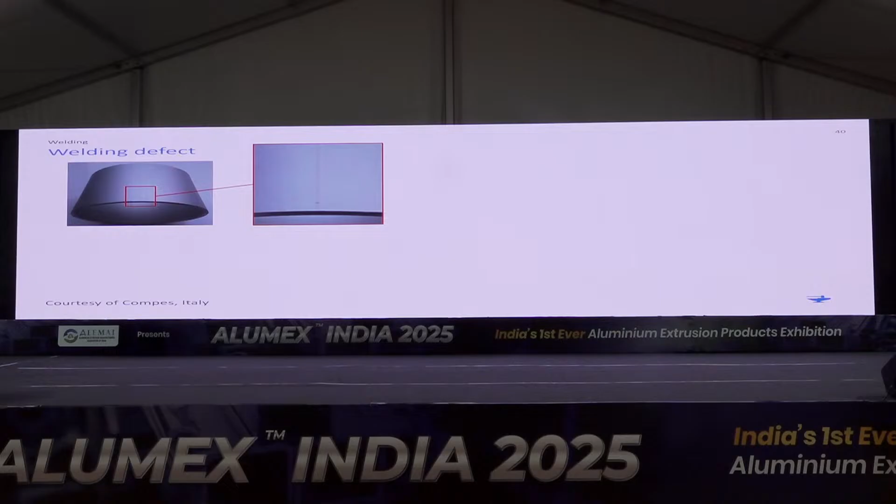So there is a case study with a simple tube where you can see a welding line all along the extrusion. Here we can find the position of this weld line, and also the values of the criterion. You can see that the value is lower than 1, which means that this weld does not have structural welding quality.

So here we can see what typically can be done when you start to optimize the design. Typically, you will try to provide more pressure under the web, but the issue is that if you do it too much, you can break the die or your profile will be out of tolerances. So always when you do an optimization, you need to look at the design and the outcomes from different perspectives, because if you do this correction, maybe it will be very difficult to do again, and you will need to recreate or re-measure the die from the very beginning.

So after this correction, you can observe that the result is much better - that is why there is no visible welding line on the surface.

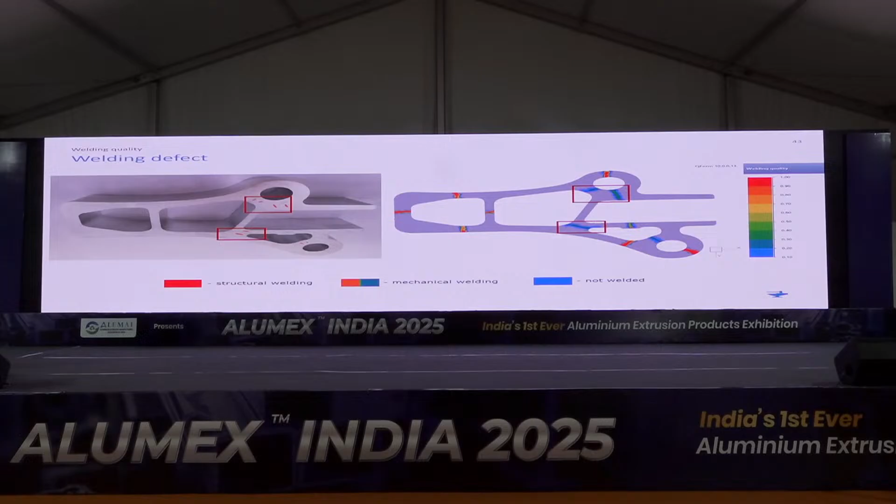Another example, just to make it faster: here you can see the area where we can see a visible interface between two different streams, so basically between two different ports that form this profile and form this weld. And this area is very bad. This is what we really can call mechanical welding. And here you can see all the welds which don't have a good quality were marked, and it has a very good correlation with the software.

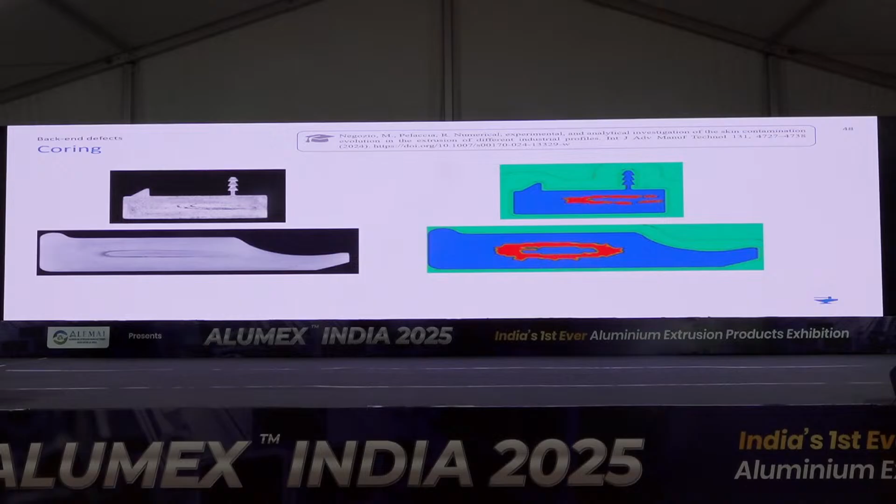There are some examples from some of our colleagues from Italy, researchers and scientists. So this is a so-called coring defect, which you can see here, which correlates well with this data. A very simple example of rod extrusion. If we rotate this rod, we can see that some part of this profile is separated and can even be extracted from it. If we look at the extrusion in section, we can find this internal, let's say, cylinder of scrap inside, and we can also predict it using simulation.

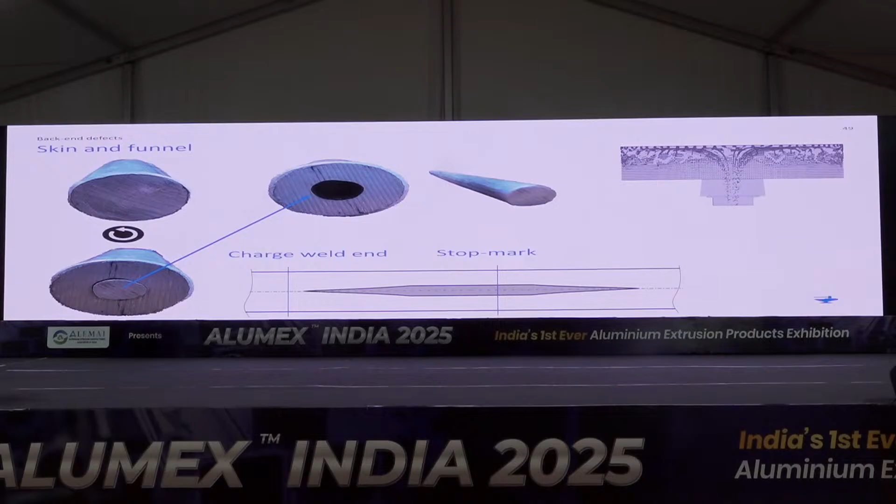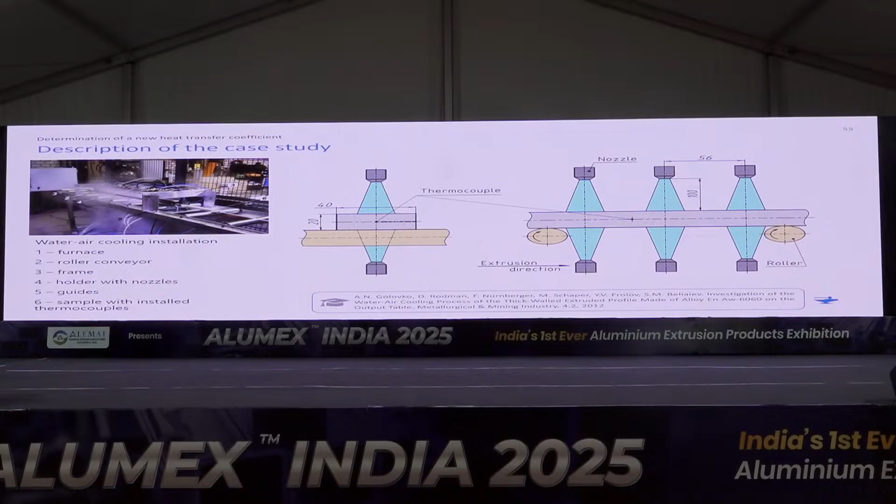And in order to implement the software, we did several tests with existing articles available in the scientific literature. There was a very interesting experiment from Hannover University, if I'm not mistaken, and we tried to simulate it. The aim of the simulation and the articles that we eventually created based on this experiment was to identify how good our heat transfer coefficient is, because here it has crucial importance for the simulation results. And here you can see that once we finished the project and customized our new heat transfer coefficient, the result matches reality considering the cooling rate.

So it means that potentially we can virtually simulate the quenching process to predict the cooling rate, the needed cooling rate, and potentially the deformation of the profile with the accurately predicted cooling rate. In order to set up this type of simulation, you will need to do the following. The first thing is to create the model for the quenching station.

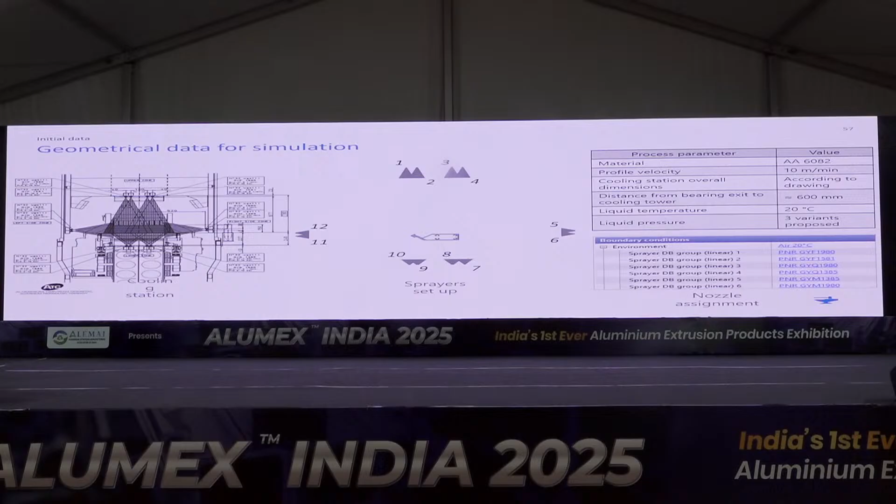This is a cooling station where you can position all the sprayers, provide some parameters for the nozzles, assign some additional geometrical parameters, and so on, and then you need to set up the simulation. The initial data for this simulation will be the section of the profile, which you can see here.

This is the profile right after the extrusion, and that is why you can see some non-uniformity of the temperature distribution. And here it is important. In the software, yes, it is possible to simulate with uniform temperature, but you can guess that it may be not the best idea.

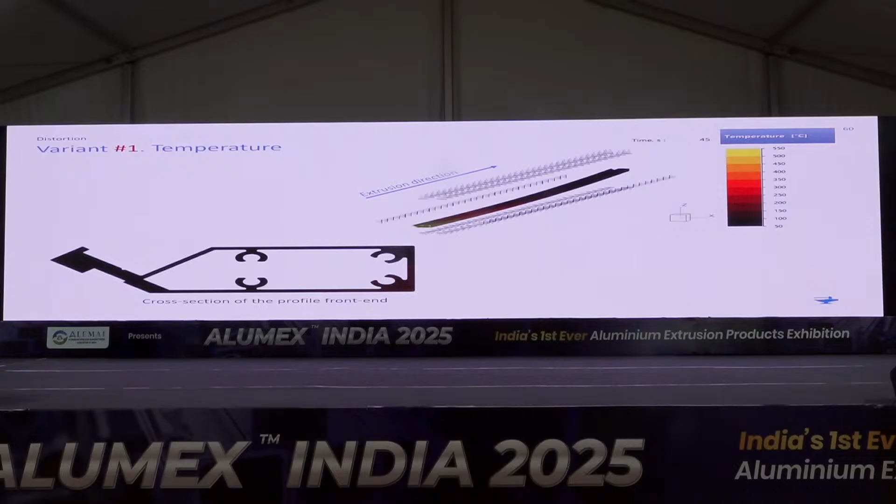Once you have simulated the extrusion process, you can set up the quenching station parameters like flow rate in a particular nozzle or pressure, which typically fully determines the intensity of the cooling. Then you simulate the quenching process, checking if the cooling process is good enough, considering the displacement of the profile, the thickness variation, or whatever is of interest, maybe even grain size.

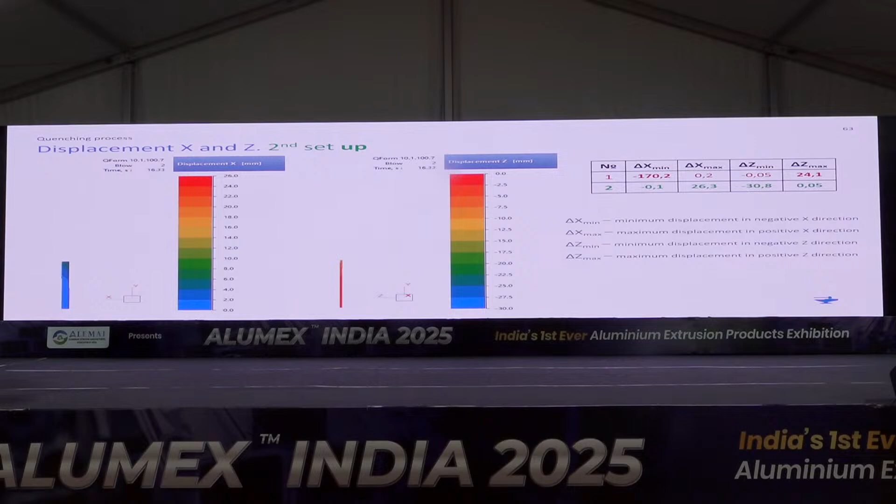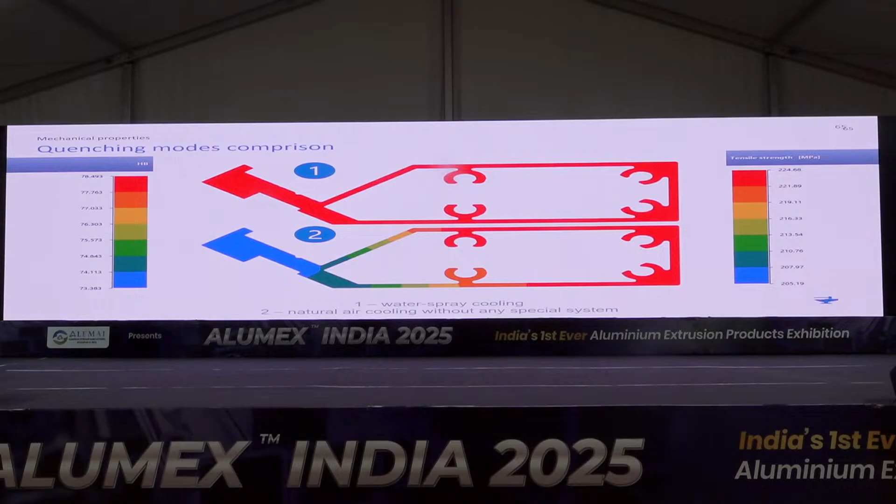Mechanical properties also can be predicted using the software. Once we have a good cooling rate, we will not end up with a very huge non-uniformity of the mechanical properties distribution inside the profile. If it is not that good, you will have some non-uniformity, like in the second case. Also, you can check the section itself after the process.

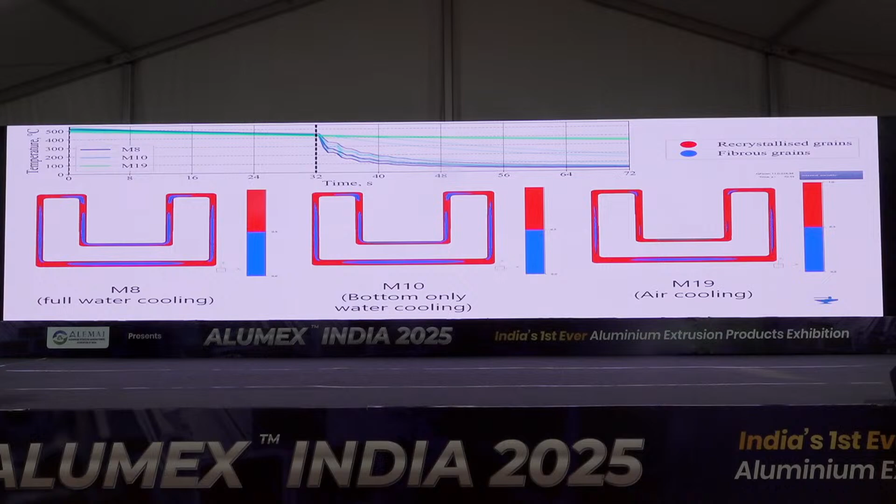At the top, M8, M10, and M19 just refer to different cooling rates. M19 is only air cooling, and here you can see that the recrystallized grain layer is the biggest, which we can observe here as well in the result. Between M8 and M10 there was no big difference, that's why I used only one picture.

While on air cooling you can see a completely different structure considering the thickness of the fibrous grains and PCG layer. It's a 6005 LA, that's why this layer is so big. If it were 6082, I would not expect such a variation, but it's also possible. So this is the result.

So in conclusion, the application in industry is wide now. It's not only useful for the die designer. So basically, if they want to start a new project, they can optimize the profile velocity and check the dimensions of the profile. But it's not the whole story. If they have a good configuration, like it was presented in the last presentation, they can do much more with the simulation possibilities. And extruders are always interested in temperature velocity mode and productivity optimization.

Because if you find the limit of the extrusion speed using the simulation software, it's a good thing to know before you start the extrusion. Profile quality control: all the defects that we discussed today can be predicted. Scrap control is very important. Quenching finally is available. And for both sides, die life control and charge weld control are very important.

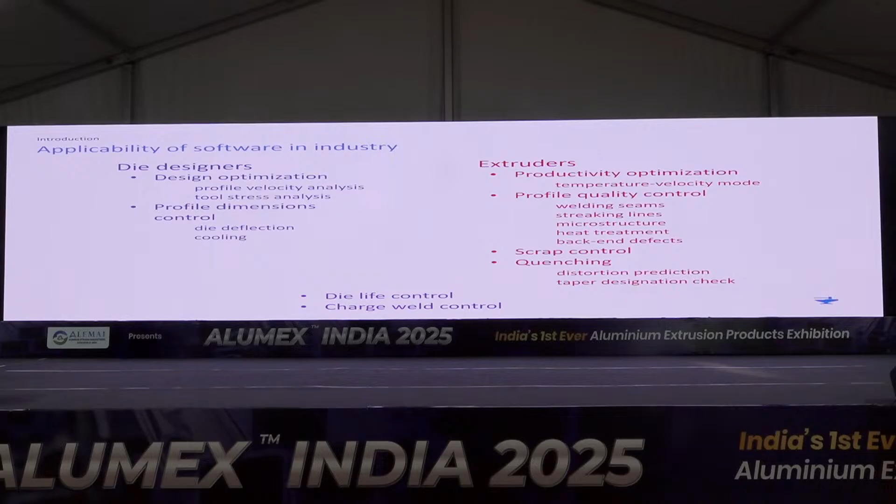So basically that's it. This is what I wanted to show you concerning the simulation capabilities that we currently have. So we can start basically from scratch, create the design, and end up with an analysis of the quenched and cooled section. Thank you for your time.